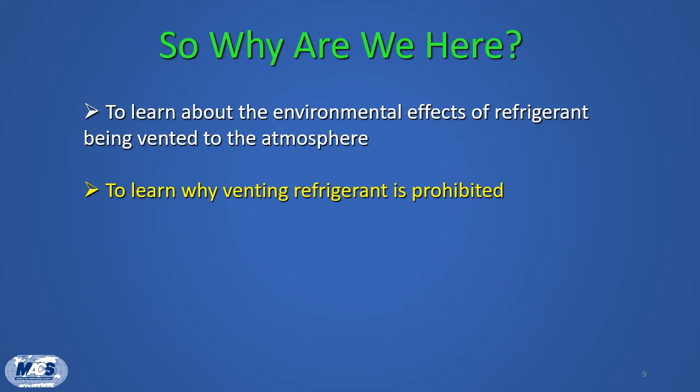Let's talk a little about the basic goals of the Technician Training and Certification Program. It's important to understand the environmental impact of venting refrigerant to the atmosphere. Venting refrigerant is illegal and punishable by large fines.

You need to know the government's rules and regulations applicable to technicians and shops working on mobile air conditioning systems. This includes not only automotive and light truck repair shops, but also those who service medium and heavy-duty trucks, over-the-road highway trucks and tractor trailers, construction equipment such as backhoes, dozers, and excavators, along with agricultural equipment, and even some aircraft and helicopters, which use belt-driven compressors and mobile AC refrigerants.

You also need to know how to properly recover refrigerant. Along the way, we'll also review some best service practices that will help you keep your customers happy and maybe help you save some money and do your work more efficiently.

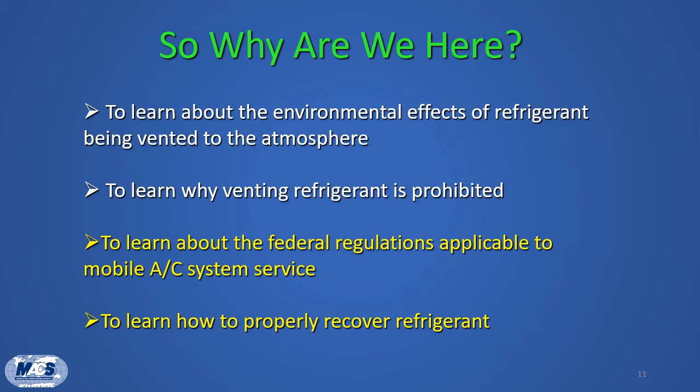To begin, we'll take a look at the historical context, which begins in the 1970s. Two scientists from the University of California came up with a theory which said that chlorine is making its way up to the top part of our atmosphere, to an area called the stratosphere. Once there, it latches onto and destroys ozone molecules. So in our case, the chlorine was coming from R12, which was the mobile AC refrigerant used before 1995.

Refrigerant 12 is a CFC, or chlorofluorocarbon molecule, with chlorine being one of its main components. CFCs released from air conditioning leaks and service, aerosol spray cans, and even household refrigerators and bromine pesticides can make their way up to the stratosphere.

Over time, this destruction of stratospheric ozone allows ultraviolet radiation from the sun to reach the surface of the Earth, where it can cause damage to plants, crops, animals, and also to people.

Before the 1990s, it was common practice to just add refrigerant to leaking systems. It was also common practice to vent the entire refrigerant charge to the atmosphere if the system required any type of service which involved opening the refrigerant circuit. These practices were acceptable because refrigerant was relatively inexpensive and thought to be environmentally benign.

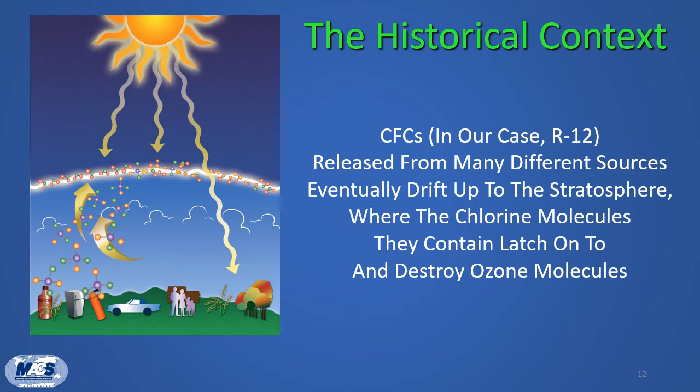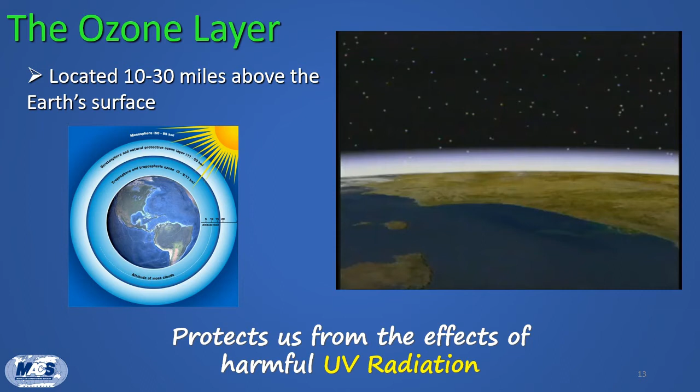The ozone layer is located in the stratosphere between 10 and 30 miles above the Earth's surface. The ozone layer acts as a shield against harmful solar ultraviolet beta, or UVB, radiation. Ozone normally absorbs UVB. Decreasing the amount of stratospheric ozone results in higher levels of UVB reaching the Earth's surface, and this increase can be harmful to humans, animals, plants, and the environment as a whole.

A concern identified under the Montreal Protocol was that a significant reduction in ozone in the upper atmosphere could result in long-term increases in skin cancer.

Skin cancer is a serious problem, and cases of 3 distinct types have increased because of depletion of the ozone layer. Basal and squamous cell skin cancers are the 2 most common types. If detected early, these cancers are treatable. Even so, approximately 1% of cases result in death. Malignant melanoma is far less common, but substantially more harmful. 6 out of 7 skin cancer fatalities are due to melanoma.

Cataracts cloud the lens of the eye, thus limiting vision. Although cataracts develop for a variety of reasons, scientific evidence supports the conclusion that increased exposure to UV radiation can increase the number of people suffering from cataracts. Damage to the immune system is another possible threat. Research suggests that exposure to UV radiation weakens the immune system's ability to fend off certain diseases.

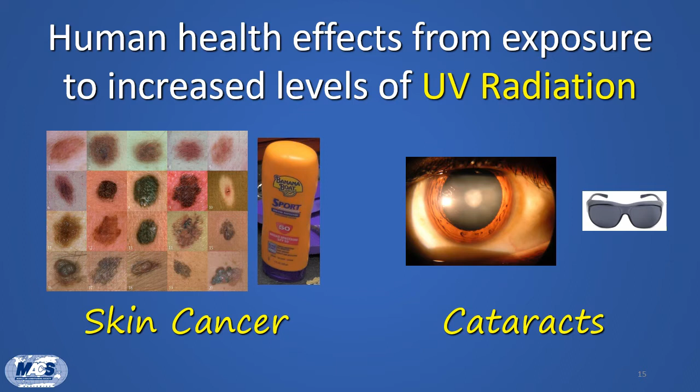CFC's ozone degrading effect became more evident when the ozone hole was discovered over Antarctica in 1985. Recognizing the global nature of the problem, in 1987, in Montreal, Quebec, 46 nations signed a treaty called the Montreal Protocol, agreeing to phase out the production of ozone-depleting substances, including R12.

Between the 1992 and 1995 model years, R134A replaced R12, and system design changes were required to assure that they performed equally as well. Some of these changes included new hose and seal materials compatible with R134A and the lubricants used with it. The new hoses and seal designs also reduced leakage. The most notable change, however, is increased condenser capacity and increased airflow to reduce system pressures at low-speed operation and city traffic conditions. In general, condenser performance for R134A systems increased approximately 30%.

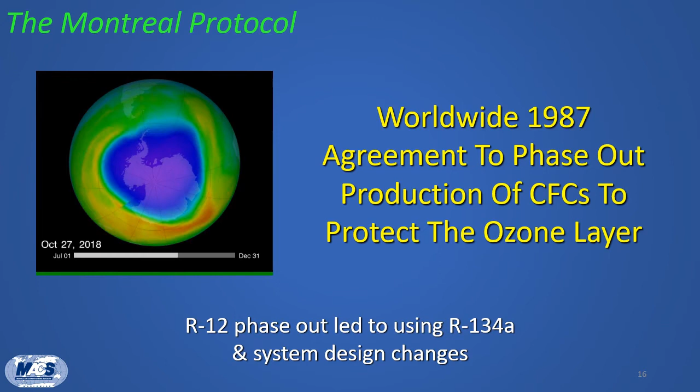However, current environmental concerns are bringing about a switch to the use of more climate-friendly refrigerants due to global warming and climate change.

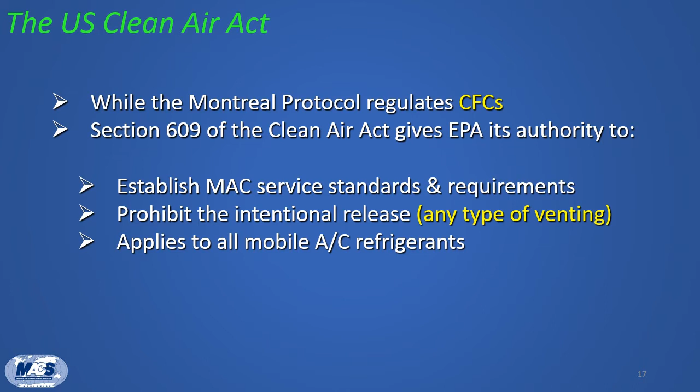So 3 years after the Montreal Protocol, our U.S. Congress passed the 1990 Clean Air Act amendments. So while the Montreal Protocol specifically regulates CFCs, Section 609 of the Clean Air Act is what gives EPA, or the Environmental Protection Agency, the authority it has to first establish mobile air conditioning service standards and requirements. It also prohibits the intentional release, which is any type of venting, of all mobile AC refrigerants.

So that's where we've been, but what's happening now? The whole environmental conversation has changed since the 1990s, and instead of the ozone hole, the new catchphrases are global warming and climate change. It's these environmental concerns that have brought the switch to more climate-friendly refrigerants.

Using CO2, carbon dioxide, as a baseline global warming gas with a GWP of 1, comparatively, R12's GWP is 10,900. This means that R12 is 10,900 times more of a global warming gas than CO2, and as such, is that much more harmful to the environment.

Moving on to R134A, the industry switched away from R12 in the 1990s in favor of R134A, which does not deplete the ozone layer. However, R134A is still a powerful greenhouse gas, which means that it helps to trap heat when released into the atmosphere. While its GWP is much lower than that of R12, it is still 1,430 times more powerful than CO2, which is why the industry is once again in transition.

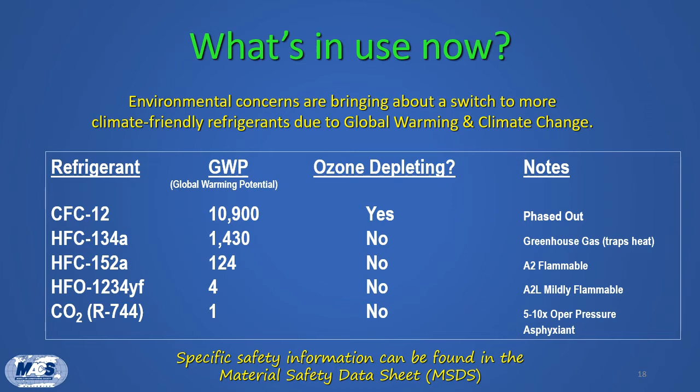So what's actually going to happen? Well, in the end, industry is going to be the one who chooses. The US EPA does not require the use of any particular refrigerant. They don't require the use of YF. They don't require 152A or CO2 or any of the other alternatives on their list. They say that OEMs, the original equipment manufacturers, are allowed to use any refrigerant that EPA has listed as acceptable, as long as they meet certain use conditions set by EPA.

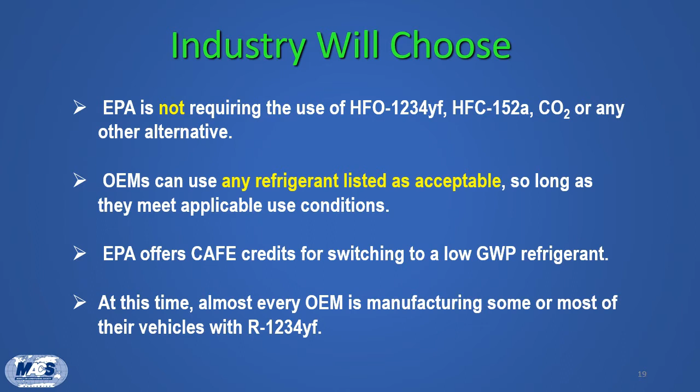EPA does try to nudge manufacturers toward more environmentally friendly refrigerants, and they do that by offering them CAFE credits toward their corporate average fuel economy if they switch to a refrigerant with lower GWP. At this time, almost every OEM, with a few exceptions, is manufacturing some, if not most or even all, of their vehicles with R1234YF.

Since the original Clean Air Act in 1990, we've had 21 new rules come out from EPA, the most recent being September 2016. For those of you who were around in the 90s, you probably remember the sales restriction on R12, which basically meant technicians needed a 609 card or a MACS card so they could walk into a local parts distributor and buy cylinders of R12. Well, the EPA never carried that restriction forward to include R134A, at least not until they passed this rule that took effect on January 1st, 2018.

So since that date, if you want to buy R134A, or any other mobile AC refrigerant, you have to have a MACS card or a Section 609 card to go into a parts store and buy refrigerants. Now, there's an exemption for those small cans sold at big box stores, but the rule says those small cans now have to have a self-sealing valve.

Prior to January 2018, the small cans had flat tops on them. So when you connected your adapter and punctured the can, you basically had to use it right away, or else whatever refrigerant was in that can would eventually vent out to the atmosphere. But the inclusion of these self-sealing valves allows the can to be resealed if only some of the refrigerant is used.

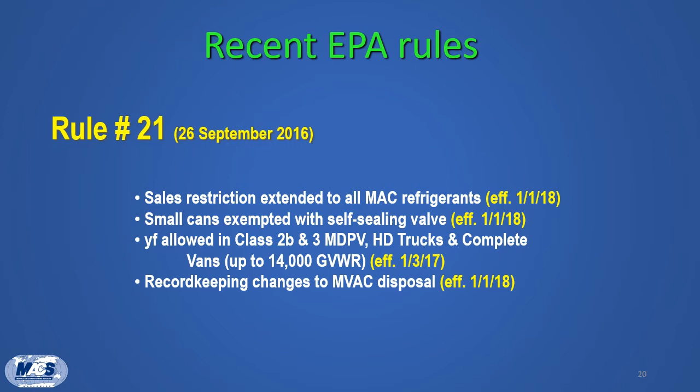So how does EPA keep track of all these refrigerants? Well, they have a list called the SNAP list, or Significant New Alternatives Policy. One of the new mainstream refrigerants on that list is HFO 1234YF, which is listed as acceptable subject to use conditions, meaning it may only be used in new vehicles with components specifically designed for it.

Okay, so what does that mean? It means that no conversions or retrofits are allowed for any existing MVAC systems. So for example, if you have a 2009 Ford that originally came with R134A, you're not allowed to take that 134A out and put R1234YF in. Likewise, if you have a 2016 Chrysler product that came originally from the factory with YF, it's against the law to take that YF out and recharge the system with R134A.

Now, some of these rules don't apply in the same way to heavy-duty trucks, refrigerated transports, some off-road vehicles like ag and farm equipment, or some construction equipment. So the bottom line is that HFO 1234YF may be used in any light vehicle with an air conditioning system designed to use it.

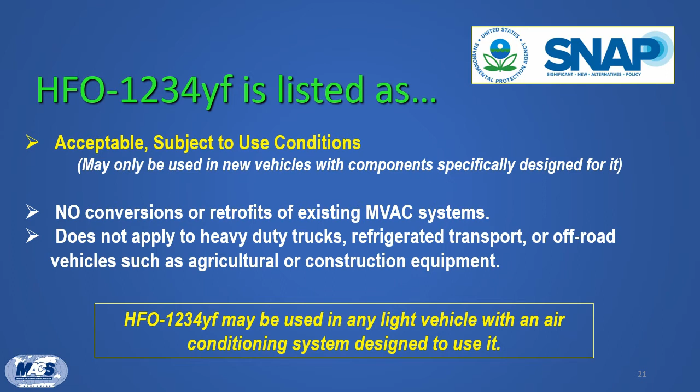All of these federal rules and regulations are available on EPA's website at www.epa.gov/MVAC, where you can also read the full text of the US Clean Air Act and Section 609.

One of the first ways that technicians were introduced to these EPA regulations was through certification. And the rule says that any technician who works for consideration, meaning you're being paid in some way, and you're opening the refrigerant circuit of a mobile AC system, then you must be certified by an approved agency such as MACS.

This certification is required so that you can purchase mobile AC refrigerants from your parts supplier, but it's also required simply to work on mobile air conditioning systems.

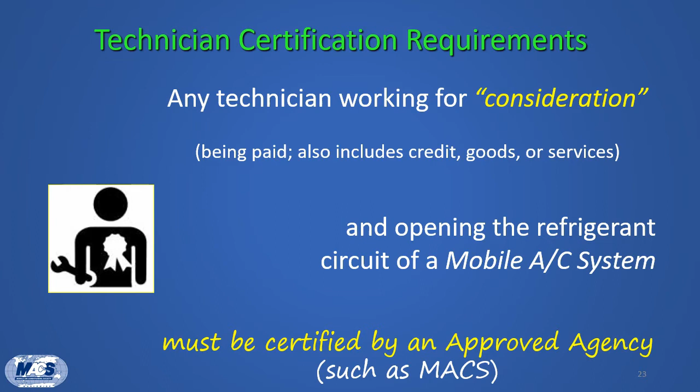Section 609 of the Clean Air Act establishes standards for the service of motor vehicle air conditioning. Fellow technicians who work on commercial, industrial, and residential air conditioning work under Section 608. Under Section 608, the EPA has established 4 different types of certification for technicians who service and repair appliances other than MVACs. Technicians who service MVAC-like appliances, such as farm equipment and off-road vehicles, can choose to be certified by either Section 609 or Section 608 Type 2.

While buses that use R12 are MVACs, other buses and vehicles using R22 as the refrigerant are not classified as MVACs or MVAC-like appliances, but rather high-pressure equipment covered under Type 2 of the Section 608 program.

Certification under Section 608 Type 2 is also required to service cargo refrigeration equipment. This photo shows a cab-over truck with cabin AC for the driver and front passenger, as well as a refrigerated container or reefer unit for the cargo box. A technician servicing this vehicle would need Section 609 certification to work on the cab AC system and would also need Section 608 certification to work on the reefer unit.

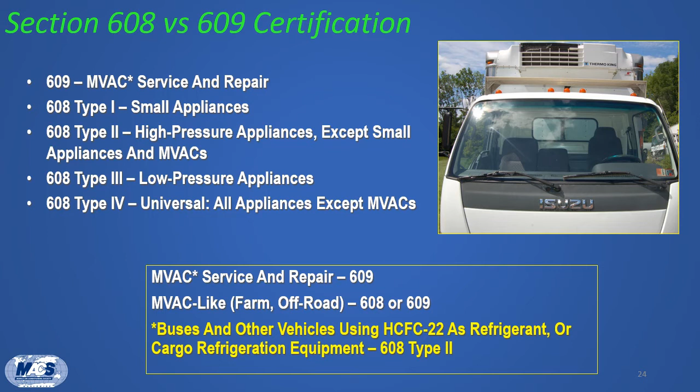So here's a question that I get all the time: what about those guys working on their own cars, those guys in the parking lots we see on the weekends? What about them? Don't they have to be certified?

Well, the way the rule's written, persons working on their own mobile air conditioning system are not covered under this rule and can add refrigerant without being certified.

However, anyone found to intentionally release refrigerant into the atmosphere under any circumstance during the repair, maintenance, or service of mobile air conditioning systems can be fined. This applies to any mobile AC refrigerant, not just R12 or 134A, but also R152A and R1234YF.

EPA assesses penalties for violations on a case-by-case basis based on many factors outlined in EPA's penalty calculation policy. Since January 31st, 2018, the Clean Air Act maximum statutory daily penalty is $44,539.

One of the first requirements to affect shops had to do with equipment. Before the 1990s, shops would simply vent refrigerant to depressurize the system for service and repairs. But new EPA regulations required shops to recover refrigerant, meaning they have to use approved and certified recovery, recycling, or recovery-only equipment. Today, most shops use what are known as RRR machines, which can recover, recycle, evacuate, and recharge the system with one machine.

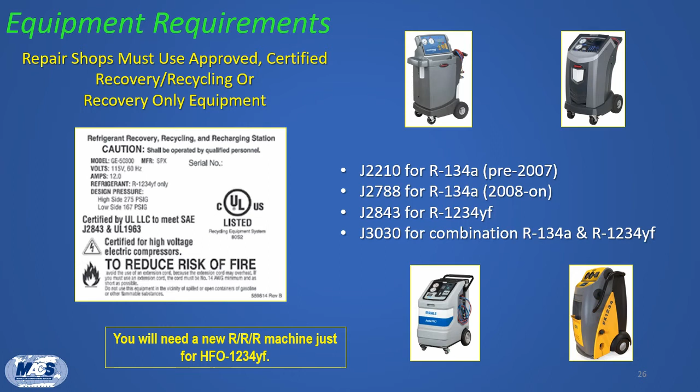There's also a rule that says shutoff valves have to be located within 12 inches of the vehicle end of the hose. Most service adapters today have the shutoff valve located right at the connector itself, but according to the rule, it has to be within 12 inches.

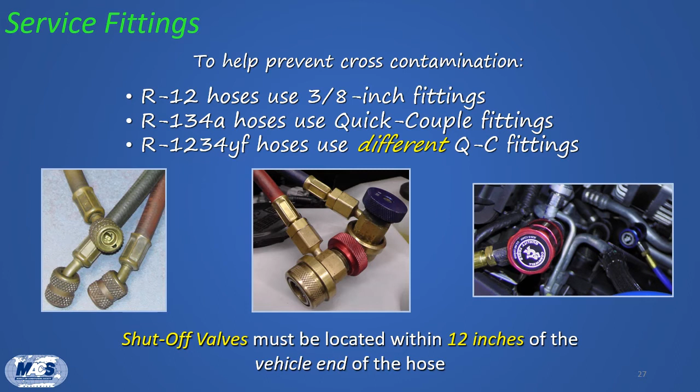We also have record-keeping requirements, which basically say that we have to register our machines with EPA. The form to do this can be found on pages 57 and 58 in your training manual, and it's a pretty easy form to fill out. You just write down the name of the shop, the address, city, state, and zip, and your phone number, and whoever's responsible for the equipment, either the owner or the shop manager. Then you have to write down the year, make, model, and serial number of your machine, and you mail it into the appropriate EPA office, depending on where your shop is located. There's no charge to do this, and you only have to do it one time for one machine.

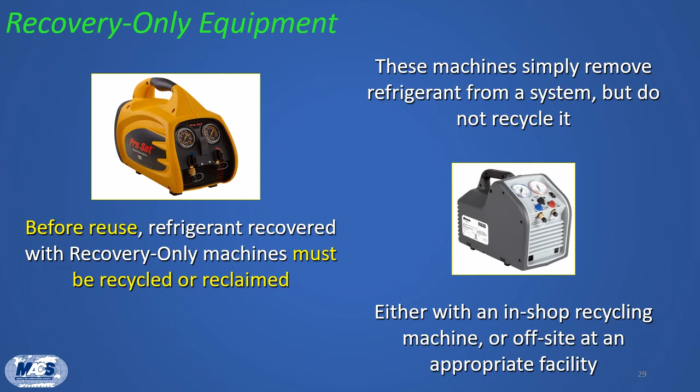But there's a lot of situations where it's just not practical to use a full-size charge cart to service an air conditioner. For example, if you provide on-the-road service for your customers, it's much easier to carry around recovery-only equipment so that you can recover the refrigerant out of the system before you perform any work. Now, before you reuse any of that refrigerant that you've recovered with a recovery-only machine, that refrigerant must be recycled or fully reclaimed. These machines simply remove the refrigerant from a system and they do not recycle it or clean it. So then you would either take the refrigerant back to your shop and run it through your full-size recycling machine, or there's a lot of companies that provide refrigerant tank swapping services where they will come in and pick up your recovered refrigerant and swap the tanks out for pre-recycled refrigerant.

As for the appropriate refrigerant tanks, we have to use certain tanks for the transfer and storage of refrigerant. They have to be DOT approved, and they have to have markings on them that say either DOT 4BA or DOT 4BW. Now, this does not apply to those new cylinders of virgin refrigerant that you buy from the store. It only applies to the internal tanks inside your recovery machine or the portable tanks that you take with your recovery-only machine and go out to job sites with.

And remember, when you're working with these tanks, make sure you keep them away from excessive heat. So that means direct sunlight. Don't leave them out in the sun in front of the shop. Make sure that you don't store them in low or confined spaces. And of course, keep them away from sparks or direct flames.

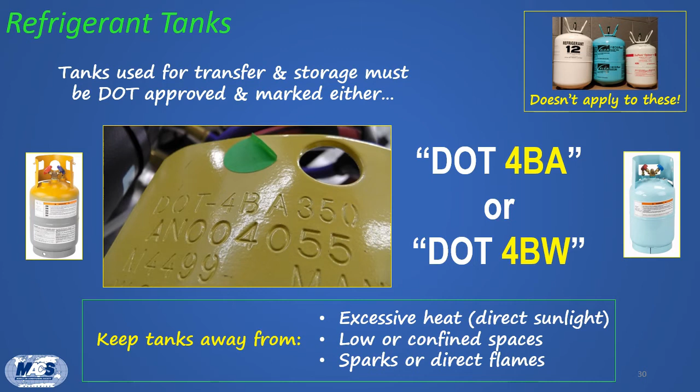And one of the most important safety comments I can make is to always, always, always wear your eye protection. When refrigerant's venting out of a leaking system, it can come out at close to negative 50 degrees Fahrenheit, which is cold enough to instantly freeze your eyeballs. So please always wear your eye protection and do not take a chance.

Also, you want to avoid breathing refrigerant because when it's leaking out, it's usually going to be carrying some lubricant vapor or mist along with it. You also don't want to allow refrigerants to come into contact with open flames and high temperature surfaces.

Also, considering that R1234YF is considered an A2L mildly flammable refrigerant, which means that it can ignite under certain circumstances. Now, R134A we think of as non-flammable, but it can actually become combustible when it's mixed with air under pressure in a sealed environment. So we want to make sure everyone knows to not use shop air to pressure test an R134A system.

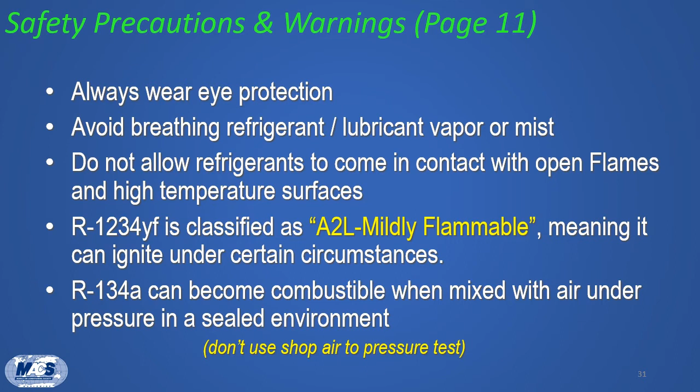For some people, PAG oil can cause redness or itchiness on exposed skin, and wearing gloves can help. Also, PAG oil is hygroscopic, just like brake fluid, which means that it absorbs moisture, in some cases, directly from the surrounding air. So keep containers closed and clean to avoid contaminating your PAG oil supply.

Also, always be careful to not overfill refrigerant tanks, particularly when using recovery-only machines. Most incorporate an in-tank sensor that helps protect against overpressurizing the tank, but some don't have that kind of device. Check with the equipment manufacturer's operating guide to learn exactly how to operate your machine and tank.

Also, be sure not to leave refrigerant tanks out in the sun or in direct sunlight. Remember that as temperature increases, so does pressure. And if the temperature of a refrigerant tank rises, so does the pressure of the refrigerant inside the tank. If the temperature or pressure of the tank is allowed to get too high, it could cause a dangerous condition. Also, do not open the covers of your recovery machine or perform maintenance work on the machine while it's connected to electrical power.

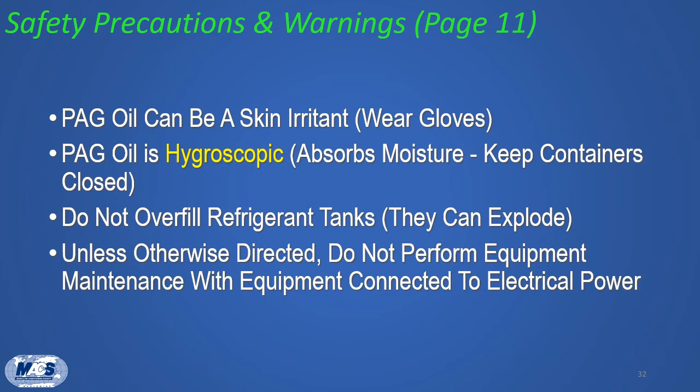The increased performance specifications for evaporators are explained in SAE standard J2842. It requires all evaporators for HFO 1234YF systems, both original equipment and replacement, to have a permanent marking, like a label, a stamp, or an etching, that indicates the refrigerant for which it was designed and that the evaporator design meets the strength requirements of SAE J2842.

Because R1234YF is a mildly flammable refrigerant, there is a concern that if an evaporator were to develop a leak, refrigerant could possibly build up in the passenger cabin. Although manufacturers take precautions with system design, industry will use special, stronger evaporators with increased protection against bursting and that are more resistant to pinhole leakage.

Also note that it is unsafe to attempt any shop repair on a leaking evaporator, and it should always be replaced with a correct new unit to maintain occupant safety. The use of a salvage or a used evaporator from another vehicle may be dangerous and is not recommended, although a refrigerant control device such as a TXV, a thermal expansion valve, or a block valve may be reused if it is serviceable. The same requirements apply to evaporators in CO2 R744 systems.

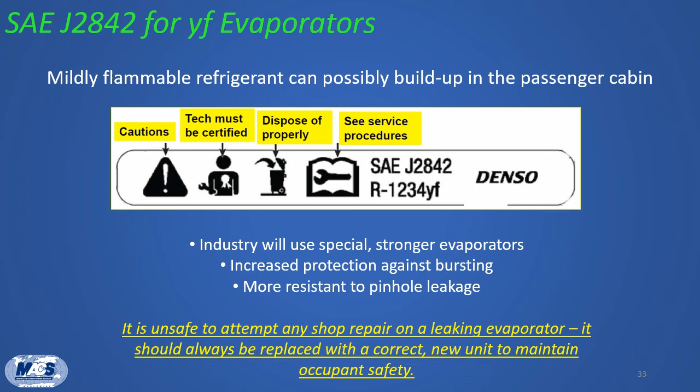Now that we've talked about some of the equipment, let's move on and talk about service. As a first step, and before you open the system, always perform a visual inspection to spot obvious problems.

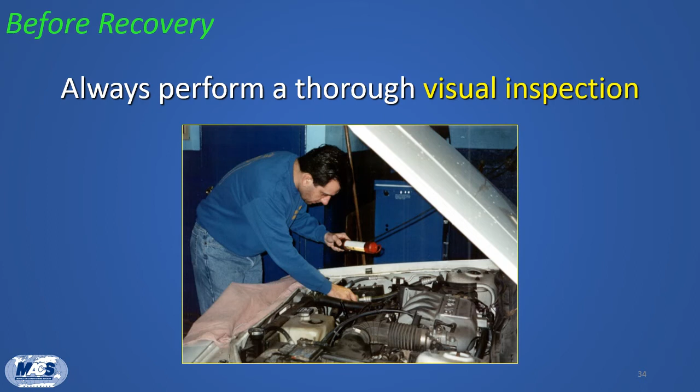Also, those service port caps themselves are actually the primary seal for the service port. And contrary to popular belief, it's not actually the Schrader valve that's down inside the port. So you want to make sure that if the system is missing its caps, that you always replace them to minimize refrigerant loss.

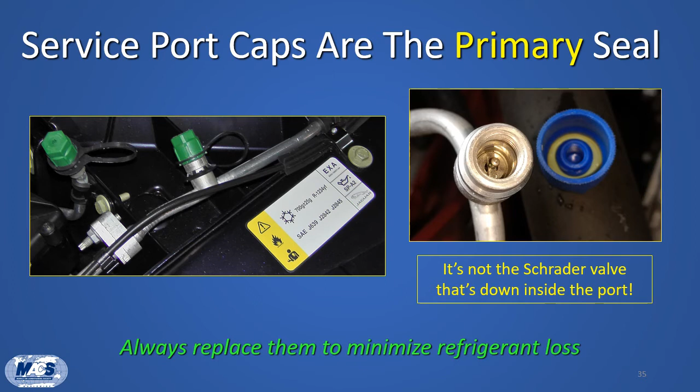Multiple refrigerants, refrigerant blends, and even hydrocarbons may be present in a mobile AC system. A refrigerant identifier can help alert you to refrigerant contamination problems to prevent you from contaminating your service equipment and other AC systems you may service later with the contaminated refrigerant.

The service industry and EPA strongly recommend but do not require the use of this equipment. You can also use an identifier to help confirm what type of refrigerant is in a container. The identifier should conform to the SAE standards to assure that the unit correctly identifies refrigerants. Keep in mind, however, that even the best identifier may not be capable of indicating all the possible combinations of chemicals that may be in an AC system or a storage tank.

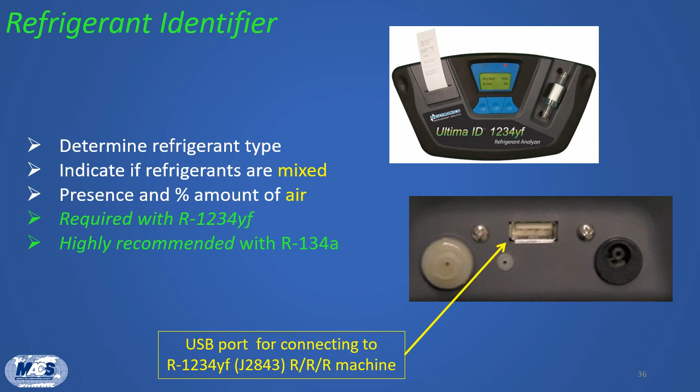Keep in mind this specific distinction. While EPA does not require the use of a refrigerant identifier, all RRR machines designed for use with R1234YF will require refrigerant identification prior to recovery. SAE J2843 requires that all recovery, recycle, and recharge machines built for use with HFO 1234YF have either an integrated refrigerant identifier or be capable of receiving input from a non-integrated identifier with a USB port.

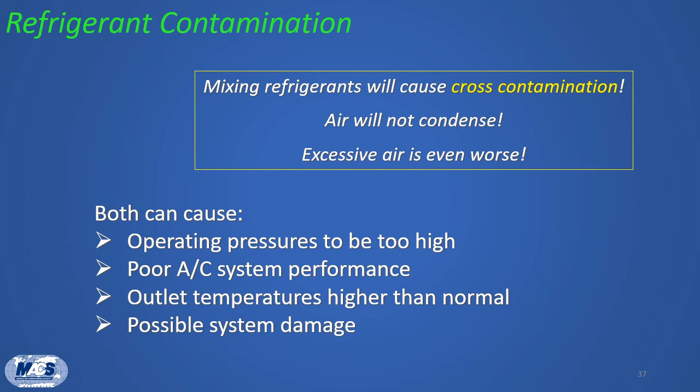Mixing of refrigerants or cross-contamination, even a very small quantity of one refrigerant mixed with another refrigerant, can cause system operating problems and poor system performance. If refrigerant is identified as being mixed or cross-contaminated, it should be recovered into a junk cylinder. When that cylinder is full, it should be sent off-site to an EPA-certified reclaimer for reclamation or destruction. Remember, it is always illegal to vent any mobile AC refrigerant, even if it is mixed or cross-contaminated.

So we want to make sure that the refrigerant's pure. And some of the things we're concerned about is volatile impurities that can get mixed in, or refrigerants recovered from non-mobile sources causing contamination. So SAE has a couple standards for refrigerant purity, and they basically are looking for three things. They're looking for the presence of air, moisture, and oil. So the different standards list how much contamination is allowed for different amounts of recycled R12, R134A, and R1234YF. Now, it's not important for the test to know what those part per million numbers are, but it is important to remember that the contaminants that are being looked at are air, moisture, and oil.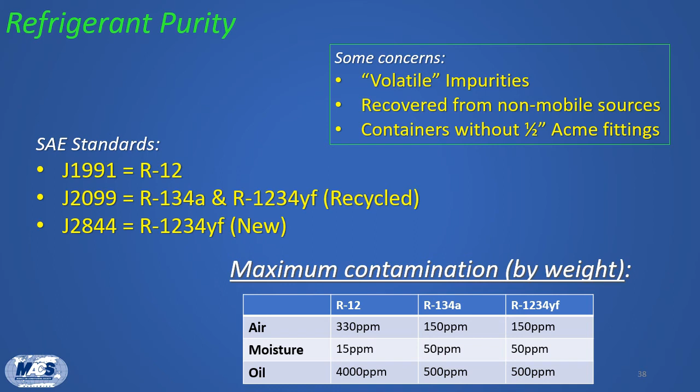And now for some tips on achieving the most complete refrigerant recovery. The amount of refrigerant that you can recover from a system depends on how much is in the system, of course, but also depends on ambient temperature, the technique you use, and the performance of the recovery machine itself.

Since the end of 2007, RRR machine manufacturers have been building equipment that meets SAE standard J2788, which offers the best recovery performance compared with earlier machine standards. These same performance requirements have also been carried forward to the YF machine standards J2843 and J3030. The accuracy requirement is that the machine can recover 95% of the refrigerant charge within 30 minutes and that it can charge a system with plus or minus a half an ounce of accuracy.

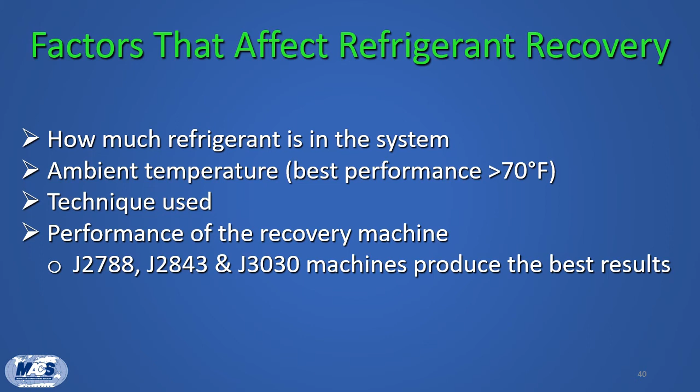To remove as much of the refrigerant as possible during the recovery process, systems equipped with orifice tubes and accumulators require more time than systems equipped with expansion valves and receiver dryers. This is mainly because of the design differences between accumulators and receiver dryers.

Being larger than dryers, accumulators, located on the low pressure side of the system, hold more refrigerant and oil than receiver dryers do. When refrigerant is removed from the system, the lowering of pressure results in some components becoming cooler. This component cooling effect makes complete refrigerant removal in a short period of time more difficult.

During the recovery process, as the system is drawn into a vacuum and pressure in the accumulator is lowered, the accumulator becomes very cold, with external frost sometimes visible on the accumulator housing. This makes it even more difficult to extract remaining refrigerant from it. If liquid refrigerant has not been removed and the refrigerant lines are opened, as the accumulator warms, a sudden release of refrigerant and oil can occur.

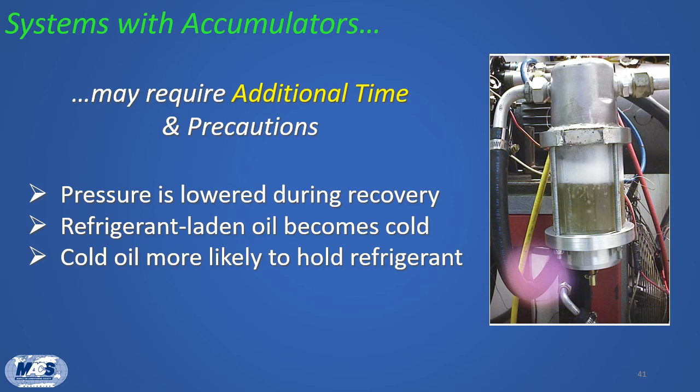Heating the accumulator with a hairdryer or electric heating pad will raise the pressure in the accumulator and reduce the amount of time necessary for refrigerant removal. But a J2788 machine does a great job over 70 degrees Fahrenheit and is designed to avoid this long procedure.

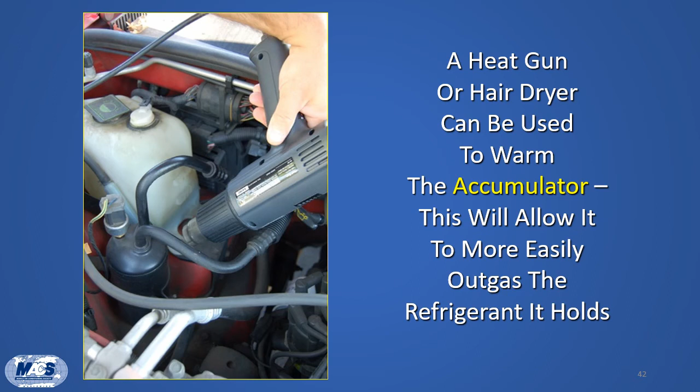But if you can't get to the accumulator, if heating it is not feasible, then at least follow the engine preheating procedure that's on page 15 in the certification manual. Let's take a look at that right now.

It's called the engine preheat for removal procedure, and it assumes that you've already done one pull with your recovery machine to try to recover the refrigerant from the system. So at this point, you're going to set the dashboard controls to have the fan or the blower motor all the way up on high.

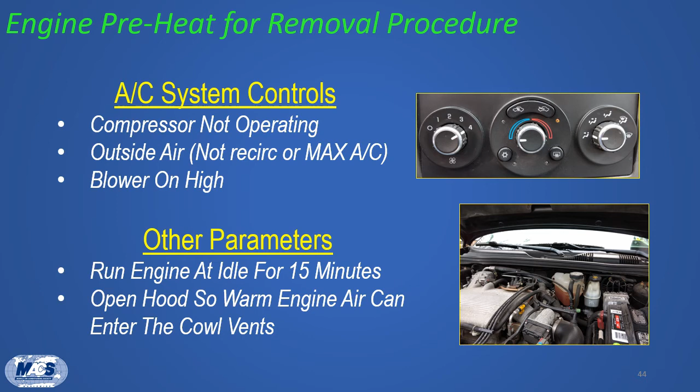You're going to turn the temperature knob all the way to cold. You're going to have it set for outside air, not recirc or MAX A/C. And the compressor is not going to be operating. You're also going to start the engine and run it at idle for 15 minutes and keep the hood open this whole time so that warm engine air can enter into the cowl vents.

At this point, you're going to turn the recovery machine back on and perform the refrigerant outgas test. During recovery, after the system is in a vacuum, you'll pause the recovery machine for 5 minutes and you'll watch the low side gauge. If that needle rises from vacuum into pressure, that means refrigerant is still in the system and further recovery is necessary.

So you'll turn the recovery machine back on again, and you'll pull it back down into a vacuum, and then pause again for 5 more minutes. And if necessary, you may have to perform this procedure over and over again until the system can remain in a stable vacuum for 2 minutes.

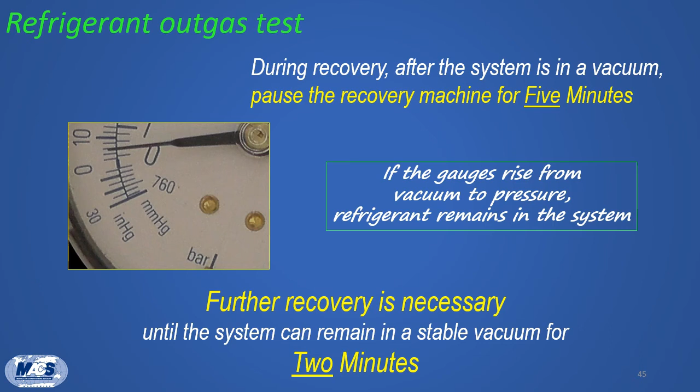Now, many of your newer recovery machines, such as J2788 for R134A or J2843 for R1234YF, will automatically perform this outgassing test for you. And in fact, the next time you run your machine, if you want, you can watch the low side gauge and see all of this taking place.

Now, this is different from the vacuum decay test, which is where you pull a vacuum down during evacuation, hopefully all the way down to 28 or 29 inches of vacuum, and then pause and look for a decay or a leak in that vacuum. That's not the same test, so don't confuse the two.

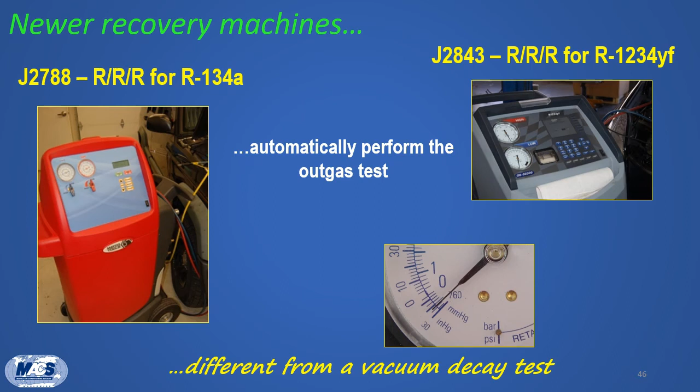After recovery is complete, you'll want to make sure you check the recovery machine's oil reservoir. That's how you can tell how much oil was removed from the system, because whatever amount was removed, you have to replace that same amount of oil with clean, fresh, new oil. And make sure that you dispose of the used oil in accordance with any federal, state, and local requirements.

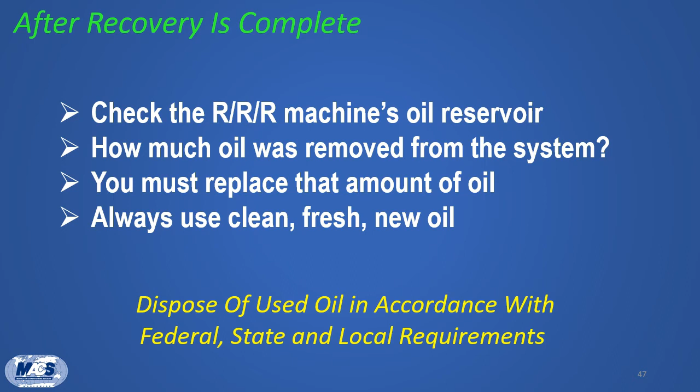Some of your recovery machines will have that oil reservoir right on the outside or on the bottom of the machine. And the container itself will have little graduations on it that show how much oil was removed during recovery. Generally, you're going to see very little oil, if any at all, but it really depends on the system you're working on. However, if a large amount of oil is removed, the system may likely have contained too much oil to begin with.

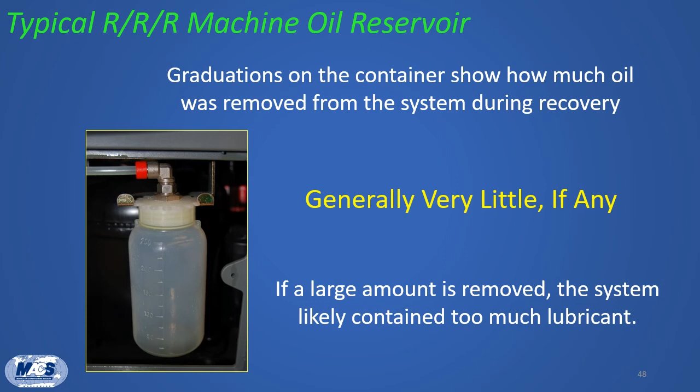When it comes to the type of oil to refill the system with, always use the proper oil type and viscosity. R12 systems used mineral oil, and R134A systems use PAG oil. But R1234YF systems use a special type of PAG oil that's not the same as R134A, so make sure you don't mix them up. Also, R1234YF, R744, R152A, and other blend refrigerants may each require different lubricants, so there really is no AC oil that fits all systems.

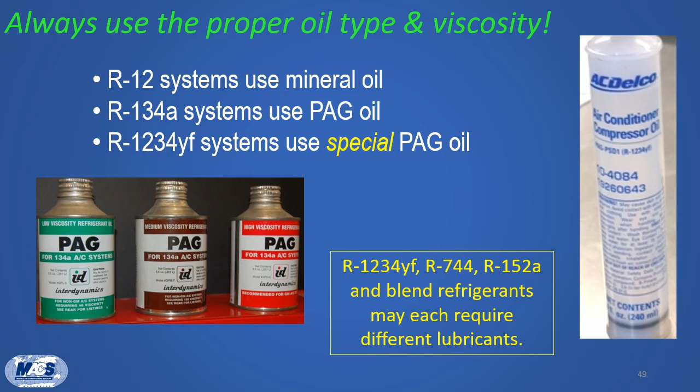It's important to make sure that recycled refrigerant does not contain air, which is a non-condensable gas, in excess of allowable amounts. If recycled refrigerant contains too much air, typically more than 2%, high system operating pressure will occur, and pressure-operated refrigerant controls will have a different control set point. This will result in loss of air conditioning performance and possible system damage.

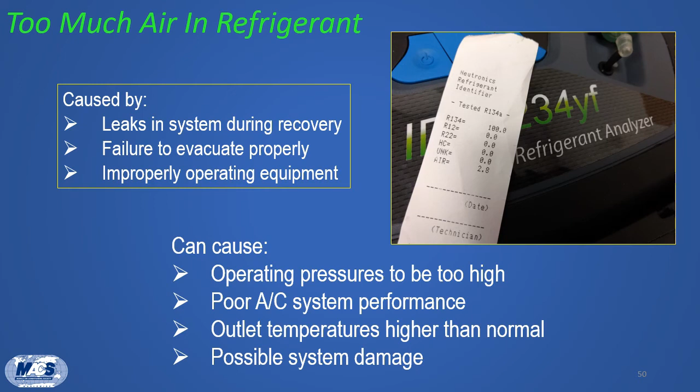Before recharging, it's important to evacuate the system, or what we call pulling a deep vacuum. We do that to remove air and moisture from the system before recharge. Most vehicle manufacturers recommend evacuating a system for 30 to 45 minutes if it's a front-only or single evaporator system, and between 45 minutes and 1 hour if it's a dual system with front and rear air and 2 evaporators. However, keep in mind that you may remove possibly no moisture during evacuation, depending on your equipment and operating conditions. So the only way to remove a significant amount of moisture is to replace the desiccant, which is found in either the receiver dryer or the accumulator.

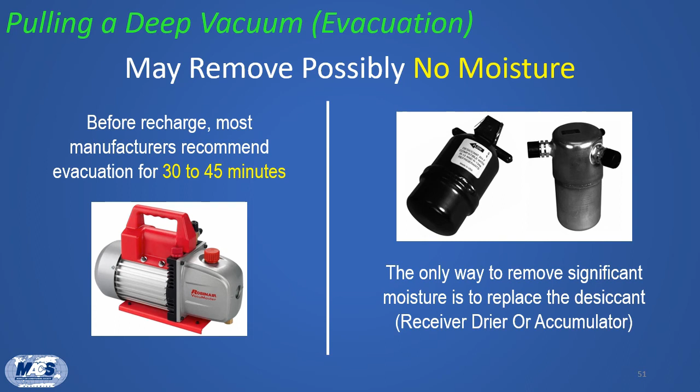To reduce refrigerant emissions, newer mobile AC systems use less refrigerant. Because of this, today's newest systems are critical charge. A critical charge system is one that is substantially less tolerant to variations in charge. The only way to properly and accurately charge a mobile AC system is to recover the refrigerant charge, evacuate the system, and then add the correct amount of refrigerant by weight using an accurate scale. Pressure gauge readings cannot determine if the charge is correct.

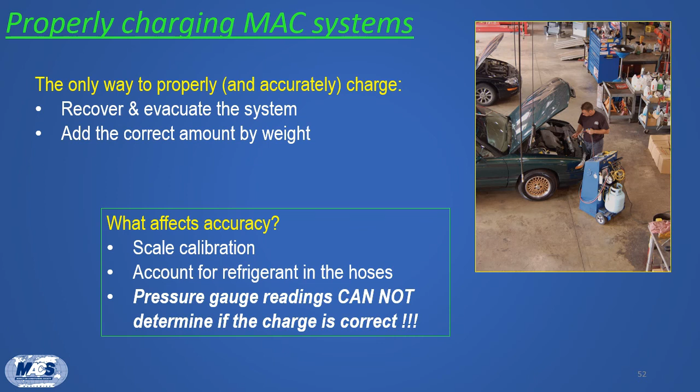Undercharges can result in poor cooling and, even worse, poor lubricant circulation, which can lead to compressor failures. Overcharges can result in high operating pressures, which can also cause poor cooling performance and even component damage. During hot weather conditions, overcharged systems can experience system shutdown from the high side pressure control switch or sensor due to high system pressure.

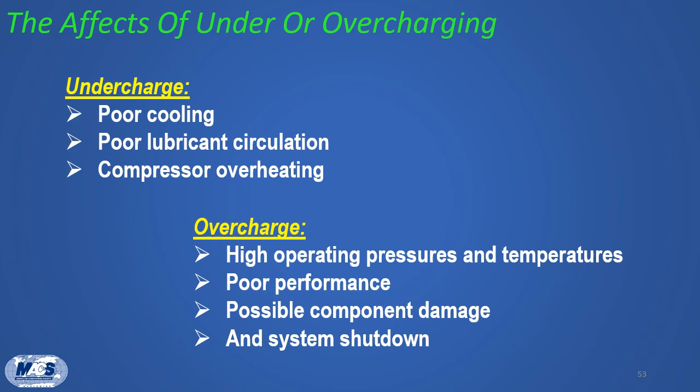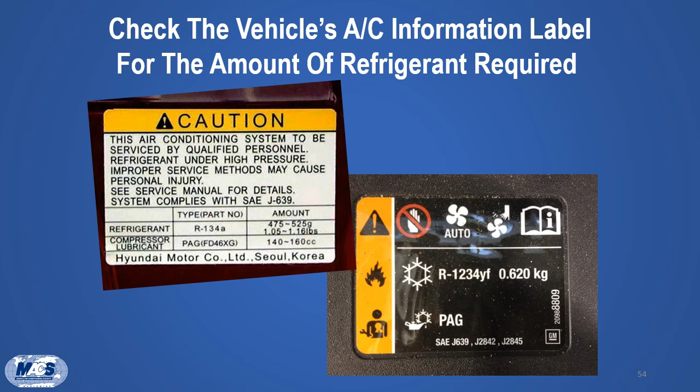The AC system label will identify the vehicle, compressor, or AC system manufacturer's recommended lubricant, often by an OE part number or designation. However, the label may not list the lubricant's viscosity. You may need to consult another source, such as a parts catalog or service information, to obtain the lubricant's viscosity rating.

Sometimes, after vehicles have left the assembly plant as a result of field operational issues, an OEM may decide to increase or decrease the refrigerant charge. But unfortunately, the change is not always reflected on a vehicle's factory-installed AC information label. So you must check service bulletins to find this type of information. Also, some replacement condensers require a change in the system charge amount, so always check when replacing a condenser.

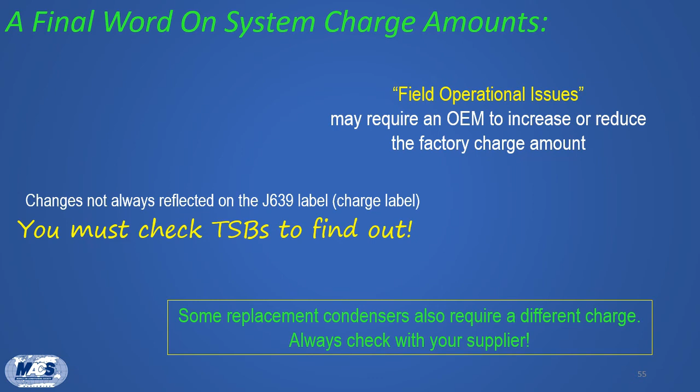A vehicle manufacturer may find out long after a vehicle hits the streets that they can get better AC performance by increasing or reducing the system's charge. Or there may have been a late change in a component that changes the charge specification, and that change was not made on the production line or on the vehicle's AC system label. So unless you have access to the latest service bulletins, you may not know about it. Also, some replacement condensers require a change in system charge spec, usually a reduction. Ask your aftermarket parts supplier for more information when installing a replacement condenser.

When you have determined that an AC system has a low refrigerant charge, you need to find the leak or leaks in the system. Many newer systems contain less refrigerant than older ones. Therefore, adding too much or too little refrigerant can quickly cause problems. EPA does not specifically forbid topping off a mobile AC system. However, several states and local laws do prohibit adding refrigerant into a known leaking system. So make sure you check the specific laws at your work location.

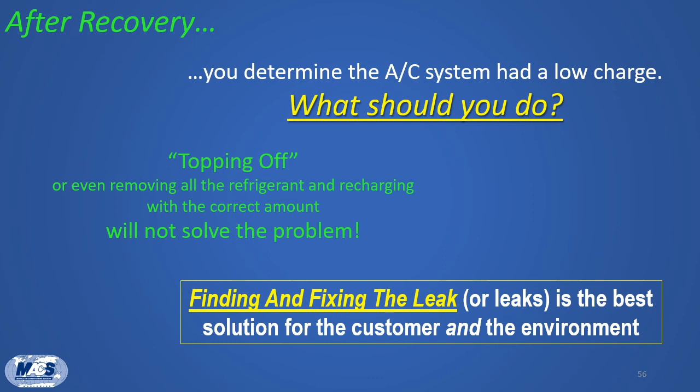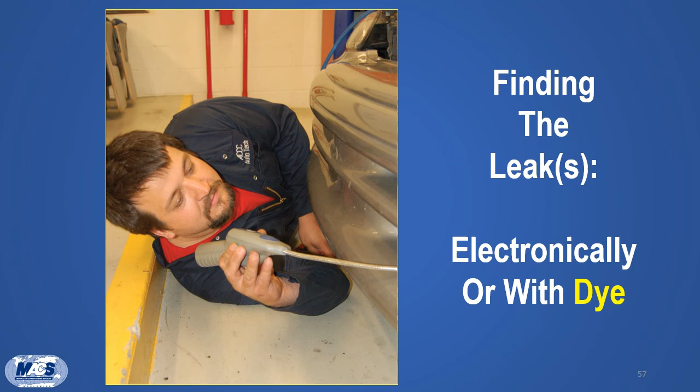Let's look at some tools and techniques for finding leaks. Soap bubbles will only identify leaks that are in excess of 40 ounces per year, compared to the use of an SAE J2788, 2791, or 2913 leak detector, which can identify leaks with a rate of less than 1 ounce per year.

The US EPA and MACS recommend that leaking systems should be repaired. Obviously, first you have to find the leak, and there's a new generation of electronic leak detectors designed to help you do that. Older leak detectors had to meet the SAE standard J1627, which were capable of identifying leakage rates of a half ounce per year at a distance of a quarter inch from the leak site. The improved SAE J2791 detectors for R134A and SAE J2913 detectors for R1234YF can identify a leak rate as low as 0.15 ounces per year.

A full refrigerant charge is not required to use an electronic leak detector. However, there must be a minimum of 50 psi in the system, which requires only about 10 to 15% of the total refrigerant charge amount. It will still work even when there's as little as 10%, because that amount will still build enough system pressure up to around 50 psi. Follow the manufacturer's instructions for proper use.

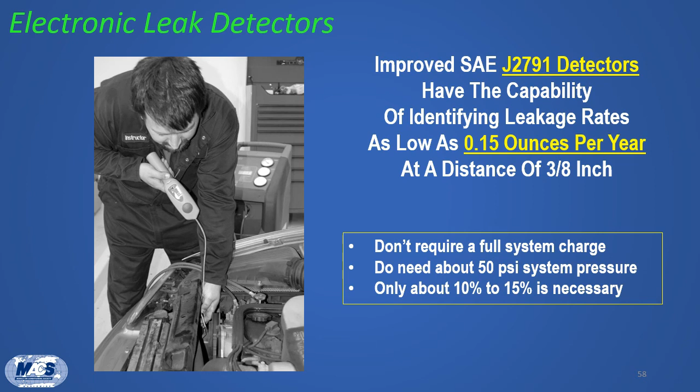Ultraviolet fluorescent trace dye systems are a popular choice for technicians today in their efforts to hunt down elusive leaks. Not only are they an inexpensive and easy-to-learn method of locating leaks, they also have the advantage of giving the shop visual proof of a leak, which can turn into an interactive experience with the customer. Keep in mind, however, that not all vehicle OEMs recommend the use of UV dye in their systems, and in fact may consider dye to be a contaminant. Always check with the vehicle's service information and follow their recommended procedures.

Remember too that dye mixes into the refrigerant oil and refrigerant carries the oil around inside the system. In order for dye to be effective, a full system refrigerant charge is required.

Open vent flushing often will not remove debris from a system. Connecting flush equipment to the service ports, even with the valve cores removed, will not provide adequate system flushing and may not result in the removal of debris and other substances. Many system and component manufacturers also have reservations concerning the use of solvents to flush systems. The main area of concern is that some solvent may remain in the system even after a prolonged deep vacuum. This residual solvent can dilute the lubricant, which can lead to inadequate compressor lubrication and possible subsequent compressor failure. It can also affect the chemical stability of the refrigerant, seals, and hose materials.

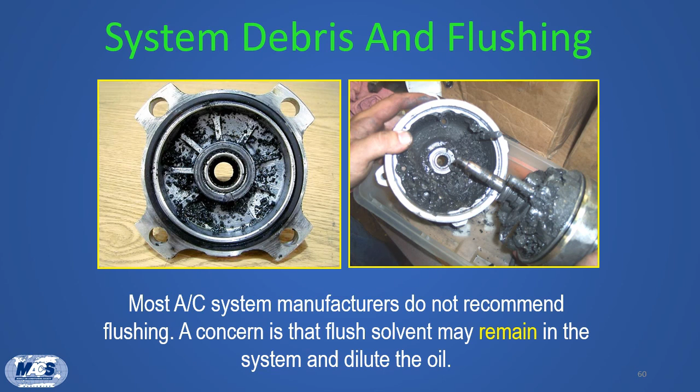Your shop tools and equipment require maintenance if you want them to operate properly. Let's look at a few specifics. Recovery, recycling, and recharge equipment should be checked frequently to ensure that no leaks exist within the internal refrigerant flow circuits, as well as the external hoses and seals. Regular maintenance of your recovery, recycling, recharge machines should help to ensure that SAE standards for purity for recycled refrigerant are met. Recovery machine filters and dryers must be replaced in accordance with the machine manufacturer's recommendations. Check the equipment manual for the filter's location.

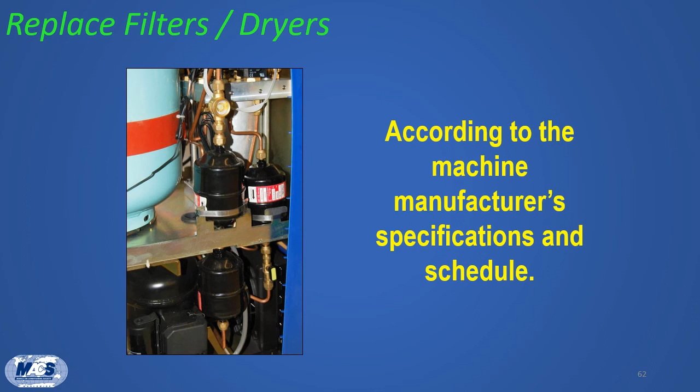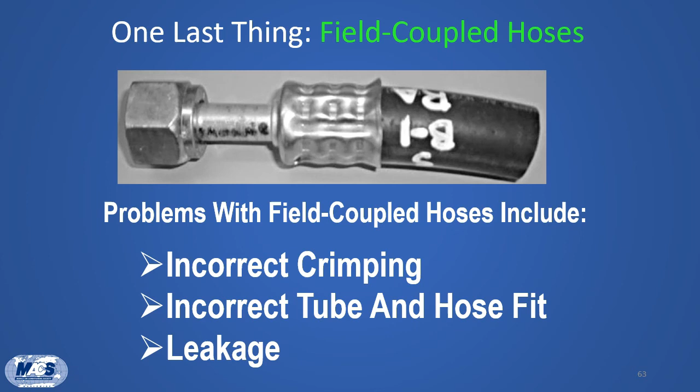And last but not least, according to an industry survey, half of the replacement coupled hose assemblies are field coupled instead of installing new replacement assemblies. If assembled improperly, these units are prone to leakage. Follow the manufacturer's procedures for tube and hose fit and crimping. In the picture shown here, a combination of the incorrect tube and hose fit and crimping technique have caused the tube to deform. Also, the assembly has been crimped, rotated, and recrimped, likely producing a leaking assembly.